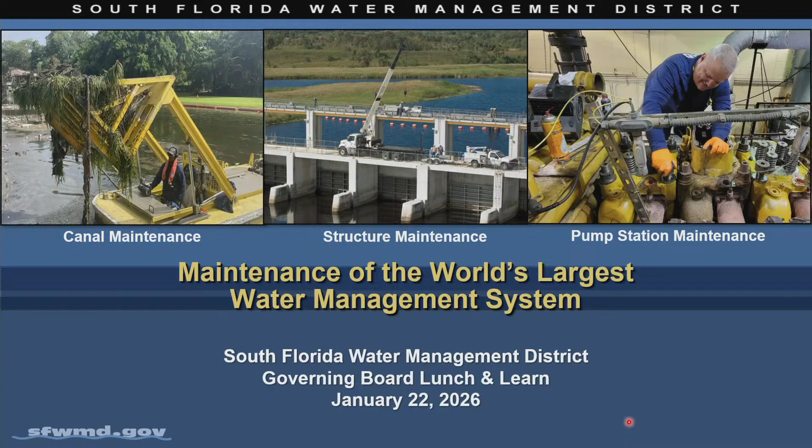Thank you, Mr. Chair. So we thought this would be a very good time frame to basically do an education of the board and the public on what it means and what it takes to maintain one of the world's largest water management systems. We just submitted last week our preliminary budget for next year. And whenever you look at the South Florida Water Management District budget, what you see is a major investment in maintenance and operations of our infrastructure. It is the lion's share of our budget, generally speaking. And so we wanted to do a lunch and learn to go through all the details and what it really means to maintain and operate our flood control system.

The rains we had with Hurricane Irma were the same that were deposited during the 40s hurricanes, and you did not have the widespread flooding that you did at that time. So it protects homes, businesses, households and communities, so it does a fantastic job. But as we have learned, it also has consequences. While it underpins the economy of the state, there's also economic impacts when it comes to dumping a lot of valuable freshwater resources into our estuaries and on top of the Everglades and Lake Okeechobee. So you end up with wildlife impacts, you end up with economic impacts.

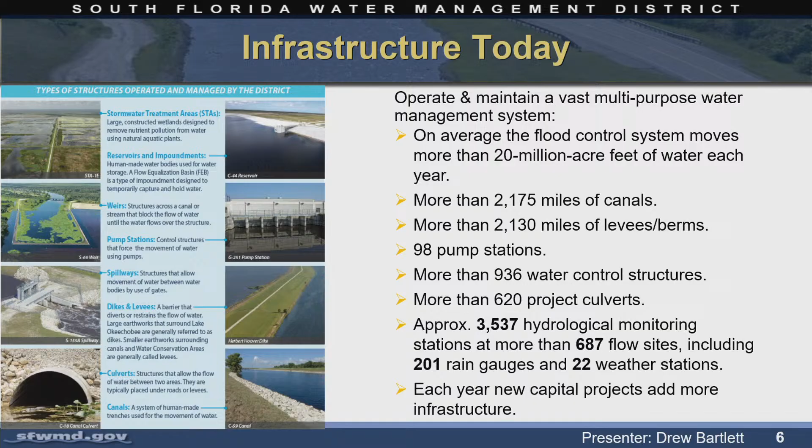And also, as we stand here today, we're adding new infrastructure year by year. Heck, next week we're going to cut the ribbon on even more infrastructure, right? And that's because of these unprecedented investments, right? We talked about the damage this system was doing to parts of our system and the economies of parts of our system. And that spawned the governor working with the legislature to really do some investments to retrofit this system.

And as of this week, we're up to 82 projects and milestones completed to basically replumb South Florida to use water better. And what that looks like is, in pre-2019, you had these harmful discharges. You remember the discharges in 2018 going west to the Caloosahatchee Estuary, taking toxic freshwater algae, then interacting with red tide and causing an economic calamity on the West Coast. The same thing happened on the East Coast in 2016, the lost summers.

And if you think about it, that's valuable fresh water. So you're dumping it out to sea, right? And the better thing to do with that is keep it in the system, protect the estuaries from those harmful discharges, and put it where it needs to be, which is what this past 7 years of investments has done. So you have better water going into Lake Okeechobee. You have reservoirs east and west of Lake Okeechobee trying to intercept those flows.

And the C-44 to the east side has been online for a couple of years. It is absolutely doing that. This past wet season, we didn't let any water out of the C-44 into the estuary. It all was put into the reservoir.

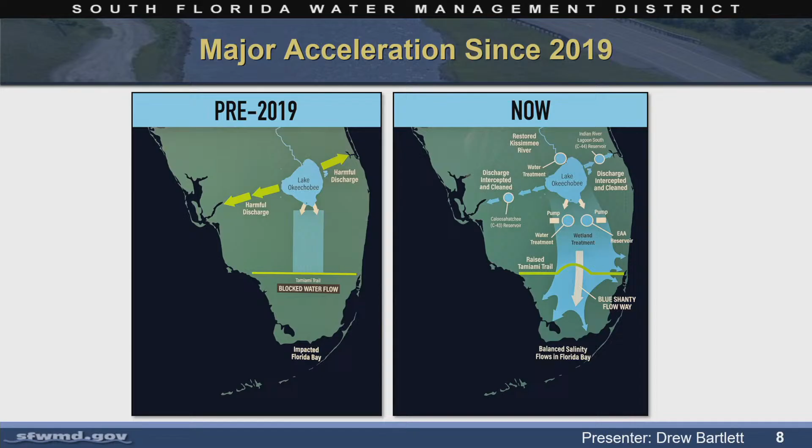And so retrofitting that whole flood control system means we're completing projects. And when we're completing projects, they're coming online and shifting to operations, right? And so we had the east and west reservoirs completed. And I've asked about the budget and the budgeting for those. For the east reservoir, it's $3 to $4 million a year. For the west reservoir, it's $4 to $5 million a year. So these are new projects coming online that we have to incorporate into our maintenance budget.

That's the same with all the STAs we've been building around the system. South of the lake, the Restoration Strategies put 60,000 acres of STAs online, and if you add up all the STAs around Lake Okeechobee, you're up to over 100,000 acres of stormwater treatment areas, all to be operated and maintained. The list goes on. I mentioned we had 82, and so the last ribbon cutting we had was for the completion of Biscayne Bay coastal wetlands. That's more pump stations, more structures to maintain.

So the amount of infrastructure we're maintaining is growing, and we are seeing the benefits. We will see the benefits for our economy. We'll see the benefits for our natural systems, and so it is absolutely worth it, but it has to be maintained. And so this is basically the size of maintenance that we do, right?

And Rich will go into more detail, but it's large pipes, it's large engines, it's massive gates. You're using machinery to do the maintenance. It is not your toolbox, right? This is big time maintenance that we have to do, and it's for the benefit of all the people. We have 9 million people in the South Florida Water Management District, 6 million along the East Coast, tons of people and businesses depending on this infrastructure, and so the maintenance becomes critically important.

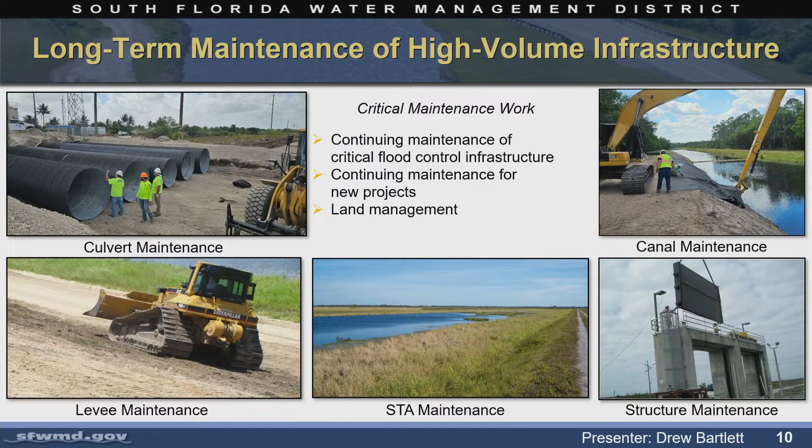You have to layer on top of maintenance basically that we have different conditions too. So Rich will get into the capital program a little bit, which talks about, hey, this structure needs to be rebuilt, but it also needs to be adapted for all these changed conditions.

The original flood control system was built to serve 2 million people, right? We've got 9 million now and growing. So it is something that has to not only be maintained, but it has to be adapted over time. And you really can't talk about the infrastructure maintenance without also talking about land management, because a lot of our infrastructure basically interacts with the land and it's there for the purpose of the land.

And so we will get into what it takes to maintain our 1,000,000 acres of land through fire, exotics control, all the different things we do to not only the hard infrastructure, but also the natural infrastructure that we have to maintain as well for the benefit of South Florida.

So while I'm talking about how it's a monumental effort that takes a lot of resources, I also have to point out that this district has also taken the initiative of making sure that we're lean when we're doing this. We're constantly innovating. We're constantly looking for ways to do more to be that impactful district to help South Florida, but not increase our taxes, right? To keep within our budgets.

And so over time, you've seen we've actually had a reduction in full-time employees. We've had a reduction in our operating budget while still accomplishing what we're accomplishing with permit reviews, all the new infrastructure we have coming online, land management, and it goes without saying that we're managing a lot more contractual dollars now than we were 10 years ago. And so we're doing more with less, but it's still a lot to do, right?

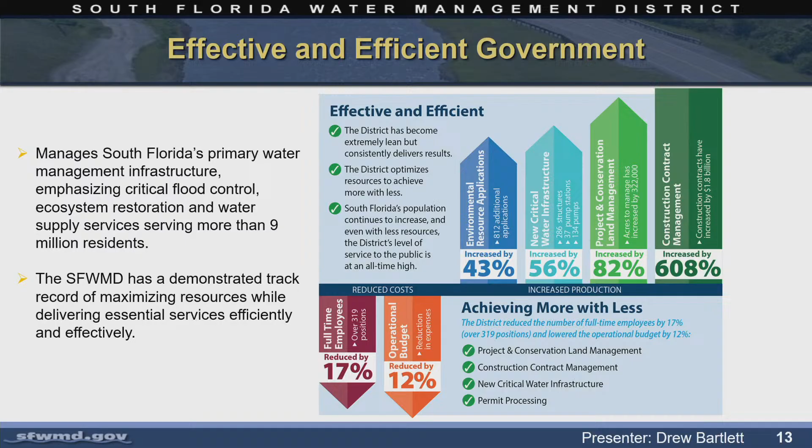So I'm going to turn it over to Rich so he can go into the details, and he's going to go into a lot of details, and that is on purpose, because to really get an understanding and a feel for what it takes to maintain this system, I think we have to dive into this and really understand what it takes. So with that, I'm going to turn it over to Rich Virgil to take you through the rest of the presentation.

Good afternoon. I'm Rich Virgil. I'm the Division Director for Field Operations. I can attest to the fact that the system has significantly grown in my 30-year tenure here at the Water Management District. I'm going to break the presentation down into multiple different facets, from the levees and berms to the canals to the structures, the pumping stations, communications, STAs, and reservoirs, and kind of give you a flavor for everything that we have to do to maintain this system.

I'm going to start with the fact that we have 8 field stations that manage all of this work, and they're located from St. Cloud to Homestead. Close to 300 staff manage all of the system for us. So I'm going to start with the levees here. The levees and berms, we've got 2,130 miles of levees and berms. They're very important to the system.

As you can see from this photo, this is a nice aerial shot from our S6 pump station, which is the inflow pump to STA2. At that corner, you can see the levees separating water conservation areas from each other. You can see a levee separating STA2 from the conservation areas. But levees also separate the water conservation areas from coastal communities in Palm Beach, Broward, and Dade. And levees also separate and segregate drainage basins within the EAA and other locations.

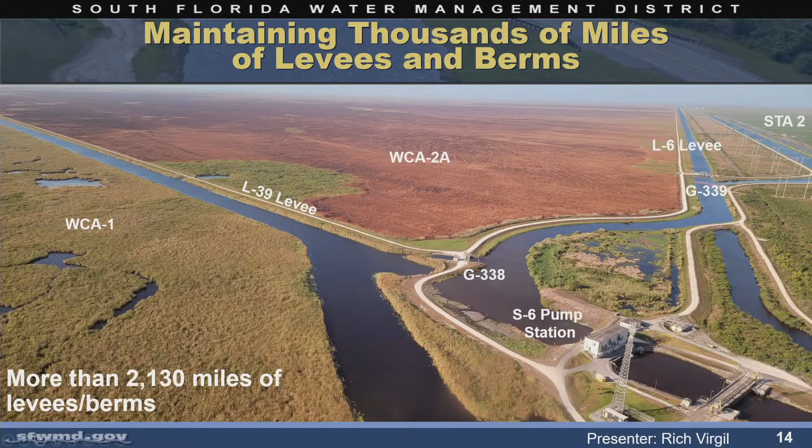So, what do we do to maintain our levees? Well, we want to prevent unwanted vegetation. And how do we do that? One of our big tools is mowing. And we mow in order to prevent woody vegetation from growing on the levees. Root systems can cause seepage. Root systems can cause unstable conditions within a levee. Uprooted trees and vegetation can cause erosion problems. And trees can even fall into canals.

So we do 4 mowing cycles per year. There are 2 types of mowing that we do: flat mowing and slope mowing. Flat mowing is open right-of-way mowing. Slope mowing is on side slopes that are greater than 2 to 1 in slope. Costs vary significantly based on location. In more urbanized conditions in the south, where contractors have to mobilize and demobilize and open gates and cross roads and bridges to complete their work, the cost is higher.

When you get into the Okeechobee area or the St. Cloud area where you have miles of open levee and canal, the cost is a lot less because they can get a lot more done in a day.

There's also an increased cost for slope mowing. Slope mowing can range from $180 to $280 per acre. It's again influenced by the urbanization effect, but it's more costly than flat mowing because you have to have specialized equipment to complete that, such as the photo here where district staff is using the articulated arm boom mower to mow the side slope.

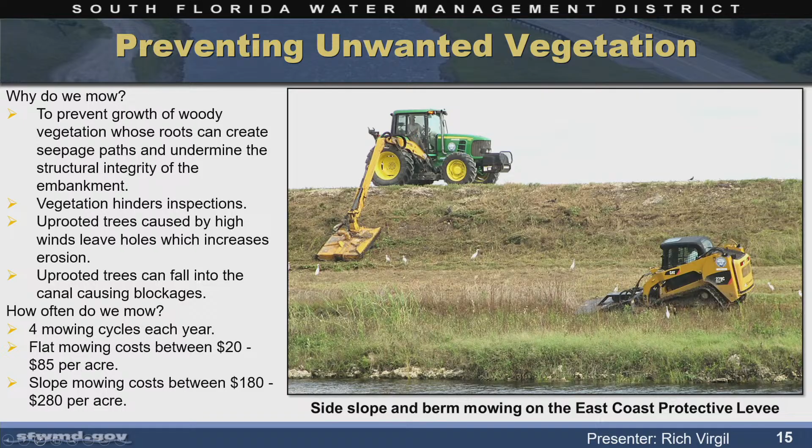In saying that we contract out mowing, we also do mowing in-house as the Fort Lauderdale team takes care of the East Coast Protective Levee throughout Broward and Miami-Dade counties.

We also maintain the levees through grading to prevent erosion. One of our main goals is to prevent the degradation of the crown elevation of the levee. So you want to do grading and control the water as it flows over from rain events so that it doesn't cause erosion to the levee.

We also have to maintain all of our roads. A lot of access is done from our levee roads and canal roads to get to all of our facilities for operation and maintenance as well as emergency response.

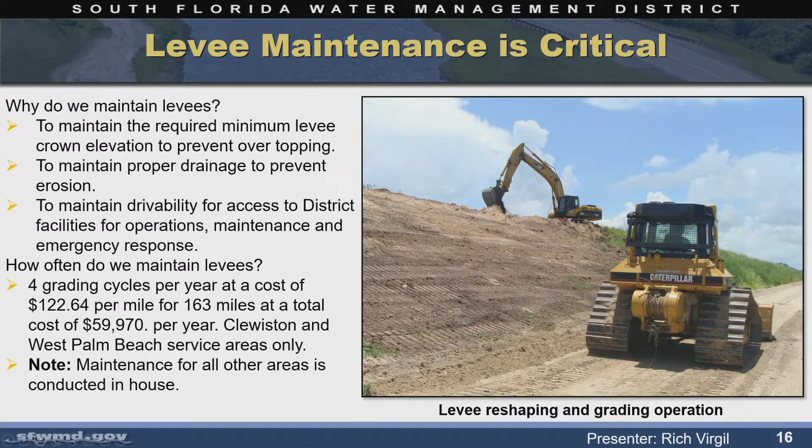Again, we do 4 grading cycles per year, and the contracts are isolated to just the West Palm and Clewiston areas because they have a lot more roads and levees to maintain because of all of the stormwater treatment areas in the area there. And then throughout the rest of the district, district staff maintain all the levees and roads. So you can see what we do to maintain that 2,100 miles of levees.

Now we're going to move into the canals. And again, we have almost 2,200 miles of canal. That's more than the distance of I-95 from Miami to the Canadian border. You can see our dredge here that works up in the Okeechobee area. I'll provide more information on that later in the presentation.

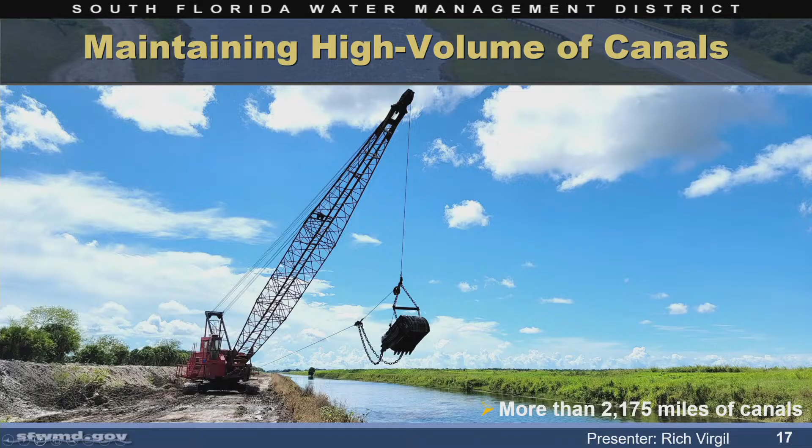So what do we need to do for our canals? Well, we need to keep debris and vegetation out of the canals to prevent flooding. Vegetation and debris can cause blockages at structures, which can increase flooding risk. We need to keep the vegetation out in order to keep conveyance moving in the canals and keep them free of issues. It also allows us to do our inspections and move around within the system.

And mechanically removing debris and vegetation from the canals keeps it from settling out to the bottom, which then can flush through the structure at a later time during high flow events.

So in Miami-Dade County, we do a lot of structure cleaning. We have a lot of debris in our canals because of the highly urbanized environment that these canals are in and serve. This is our poster child for canal cleaning at structures. The S27 is cleaned twice a week, as well as several other coastal structures in Miami-Dade.

Basically, keeping these clear keeps the structure open and the volumes flowing, but it also prevents all of this debris and vegetation from flowing downstream into Biscayne Bay, where it can have issues with water quality. It can even negatively influence marine life.

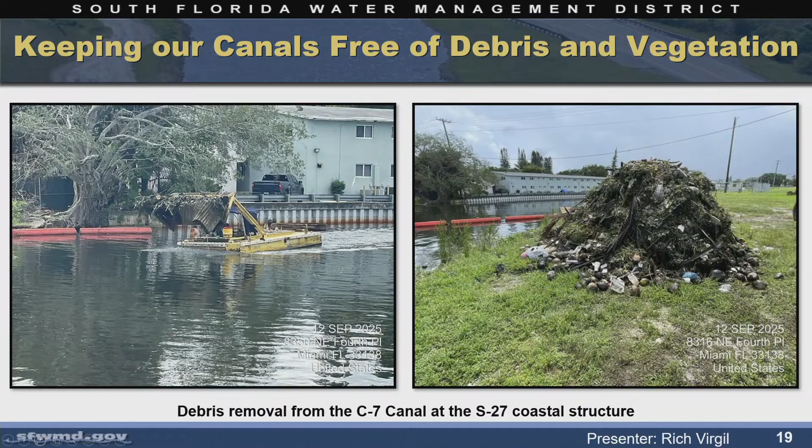So here's some canal vegetation work that we do in BCB on the Miller Canal, as well as the Miami-Dade Homestead canals. They're very shallow in nature, and those shallow canals during the summer months rapidly grow submerged aquatic vegetation, and you can get a condition in this before picture where the canal actually looks like it's topped out with vegetation. So we go in and mechanically remove this with boats and trash trucks so that we can open it up for flow like it is in the after picture on the right.

One of our other tools that we use is we work with our vegetation management section to work with contractors to remove vegetation and hazardous trees from the canal banks that can fall into the canal and cause issues with blockages. This is a picture right out here on the C51 canal where we've been working along the north edge of the canal to remove all the hazardous trees, the low hangers, the ones that overreach the canal.

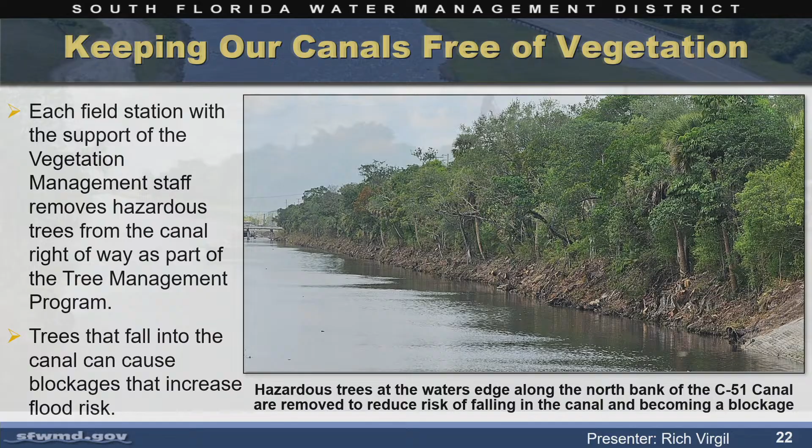The trees are then offloaded onto the bank, and then eventually they are placed into a chipping machine that shreds them up and chips them and then places them in the truck to be hauled off. So it's quite an operation, and this is just one of many locations throughout the district that we do this work each year.

Another tool is to use sterile carp. We introduce sterile carp to eat submerged aquatic vegetation from the canals. We stock the canals with these fish, not every year, but every other year or so. It's an effective way, a non-chemical way to control vegetation within the canals, to keep them all open and flowing.

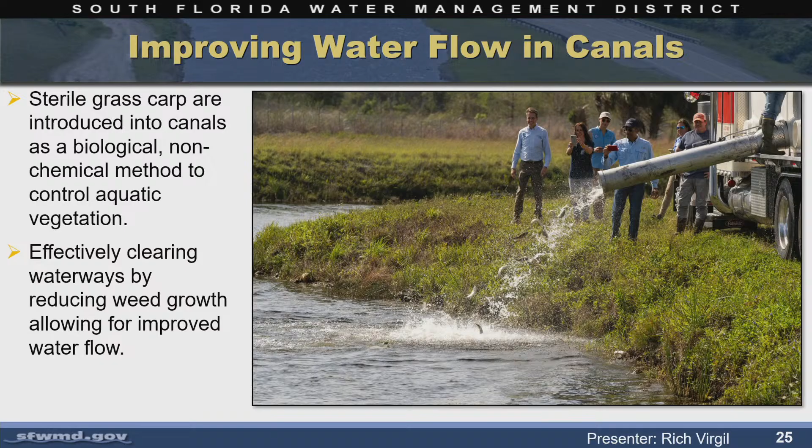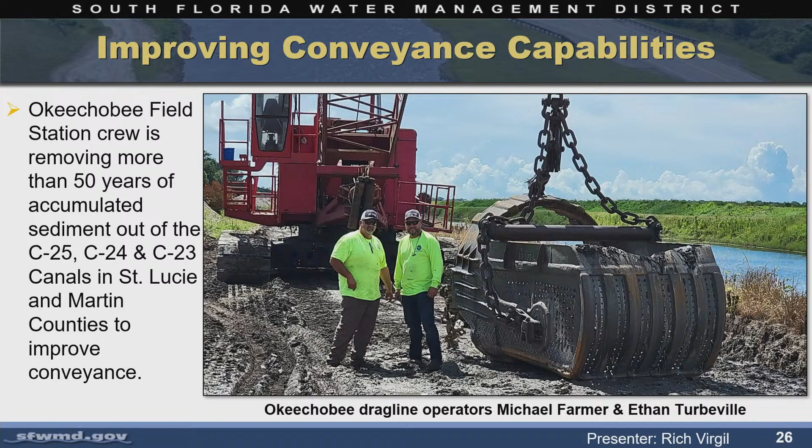I spoke earlier, we have our dredging program up in the Okeechobee area. So this is crews from the Okeechobee Field Station. They're removing about 50 years worth of accumulated sediments within the C25, 24, and 23 canals. This is going to be critical to get these canals open and ready for the CERP projects that are going to start up there in this area so they can work more efficiently.

So there's a whole process that goes into doing a dredge project. You don't just bring the dredge out and start digging. You have to be able to clear the existing spoil mound that was there when the canal was originally dug, clear all the vegetation. We open that up in order to get it ready to receive the dredge material.

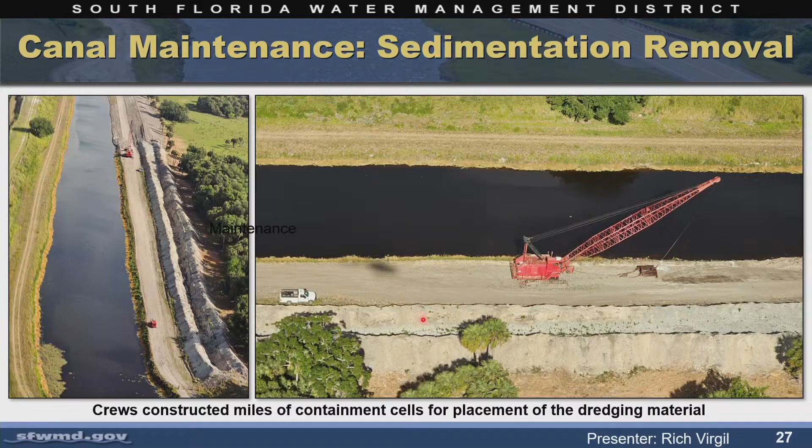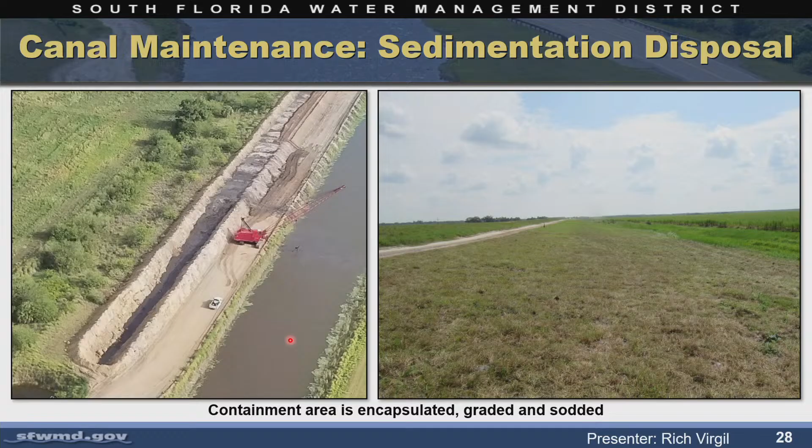Then the dredge comes in behind the prep work and starts dredging and actually fills the containment area with the spoil coming out of the canal. At the end, the containment is encapsulated, it's graded, and it's sodded to a finished product. And then hopefully we don't have to come back here for many years.

We also have a project culvert replacement program. So when these canals were originally dug by the Corps back in the 50s and 60s, project culverts were installed to drain floodwaters from the adjacent land into the canal. You don't want floodwaters from the adjacent property flowing over the canal banks, which would cause erosion. So you control the flow into the canal through a series of project culverts. There's over 620 project culverts within the system.

This is a large replacement that I'm showing you here that was done by the Okeechobee Field Station of a 50-year-old culvert on the C-41A canal. If you do not replace these periodically because they age out, they corrode, they rust, there's opportunity for them to collapse. That would damage the canal bank. It could damage a levee. So it's important that we have a program that addresses these culverts.

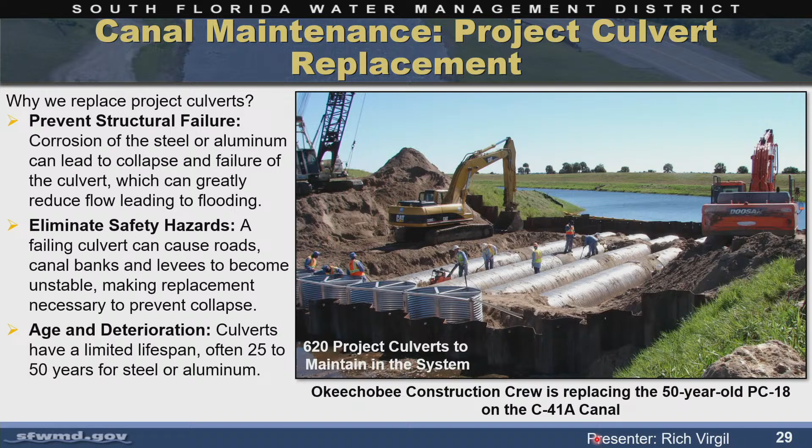So now you can see all the work that sort of goes into maintaining the canal system, right? We do vegetation management through mowing, and we do vegetation management through mechanical removal. We use carp. We do a lot of different ways to control and manage this almost 2,200 miles of canal.

Next are the structures. So we have 935 water control structures in the system. It's a massive system. This is one of our largest structures on the Kissimmee River. This is our S65E structure in conjunction with the S65EX1. Flood flow through this structure combination is 37,000 cubic feet per second.

So I'm going to get into some information on unique stuff and some different things that we do for structure maintenance. But keep in mind, structure maintenance is all about preventative maintenance. We do a preventative maintenance program on all of these structures. We have structure maintenance techs that do quarterly preventative maintenance.

We have electricians that go out to do quarterly maintenance to make sure all the power's working correctly, the gates are opening and closing, and the emergency generators on site can operate. That takes preventative maintenance, just like maintaining your car. There's also SCADA maintenance for the operations control side. We do a lot of maintenance on these structures, and we try to spend 80% of our effort in maintenance and only 20% in reactive emergency repairs and follow-up.

Here's a unique kind of maintenance above and beyond preventative maintenance. We have manatee protection systems on a lot of structures throughout the district. The manatee screens protect manatees from being harmed going through a gate, or prevent them from accessing sections of the water management system that are undesirable for them.

These screens, when the gates open, accumulate debris and vegetation, and they have to be cleaned so water can flow through the structure. This large one is cleaned at least twice a year, or as conditions warrant. It's a large mobilization and a lot of work to lift this gate out of the water. This is on a structure on the south side of Lake Okeechobee, where we shake it clean and place it back into service. We've also installed some permanent systems on some structures so we can be more reactive to the cleaning events and make it quicker and easier to do.

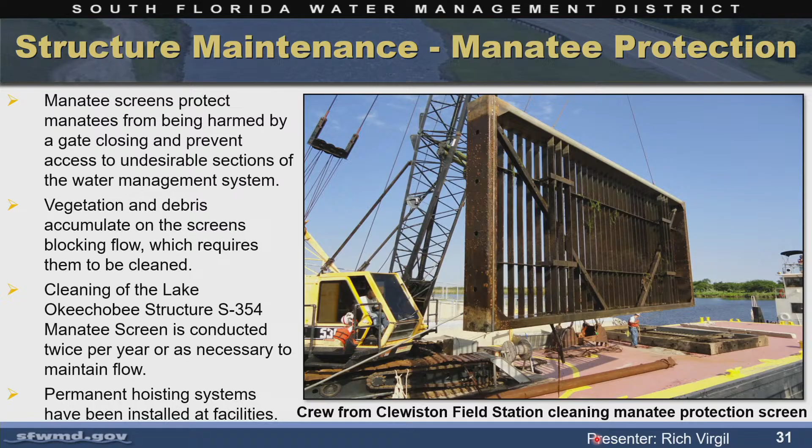We have manatee protection systems and electronic systems with bumpers on 36 gates and locks within the system. These bumpers have a life cycle of around 10 to 15 years, so they have to be changed out. Here's the field station working on this one. There's a bumper strip on each side of the gate. The cost per gate alone is in excess of about $125,000 just for the bumpers, not including the electronic side of the house, which also all has to be maintained.

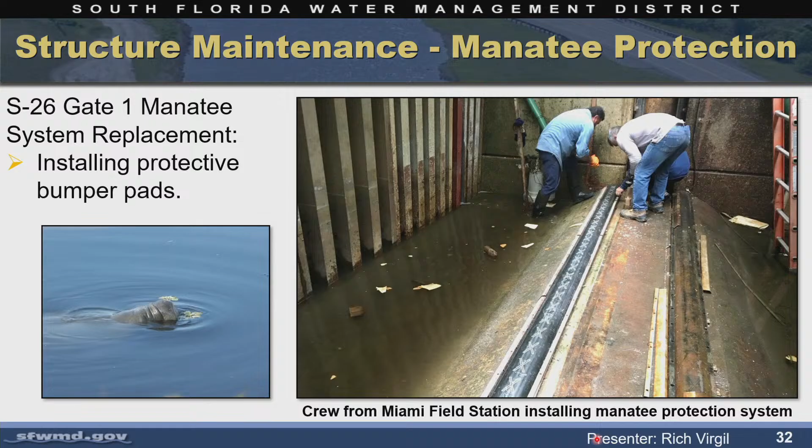Now I'm going to describe one of our big programs within the structure maintenance shop: our major gate overhaul program. We have a big facility in West Palm Beach where all the gates are sent for major overhauls. I'm going to step you through the process quickly.

Step one, we have to dry the structure in, meaning placing large panels into the structure. We have to have a diver in the water to guide the panels in and make sure the sill is cleared so you get a good seal. The panels prevent water from moving through the structure when the gate is removed.

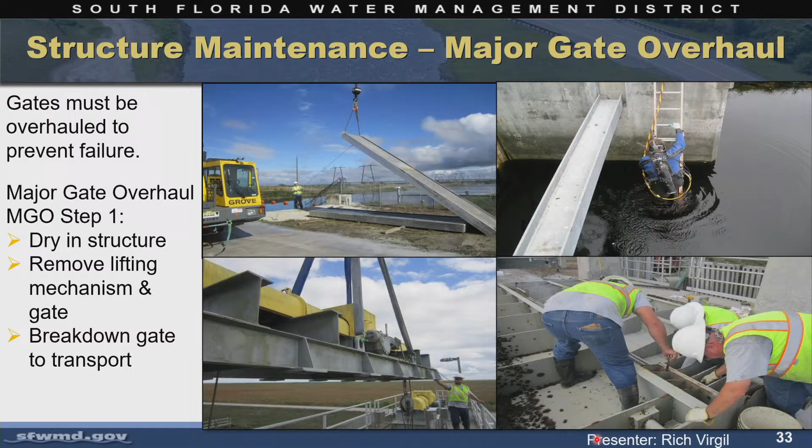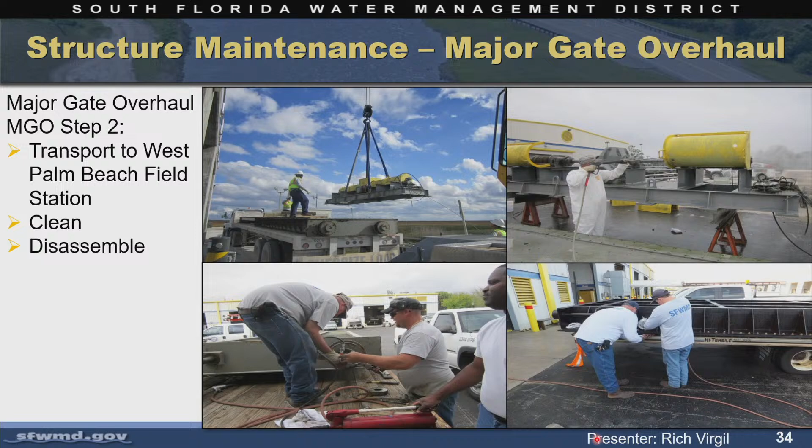Then everything has to be broken down and made ready for transport, and it's transported up to West Palm Beach. When it gets there, it's further broken down, disassembled, cleaned and prepped. We then get into making repairs to the gate, metal repairs, rust removal. The gate is completely sandblasted down, then recoated and painted in our facility in West Palm Beach.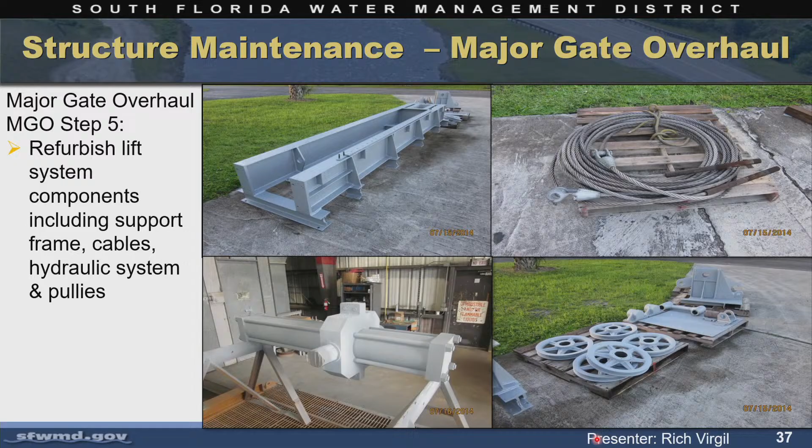Not all of them are cable driven — some are stem driven with electric motors, and those electric gearboxes and motors have to be disassembled, with seals and bearings replaced, recoated, metal work done on them, and put back together.

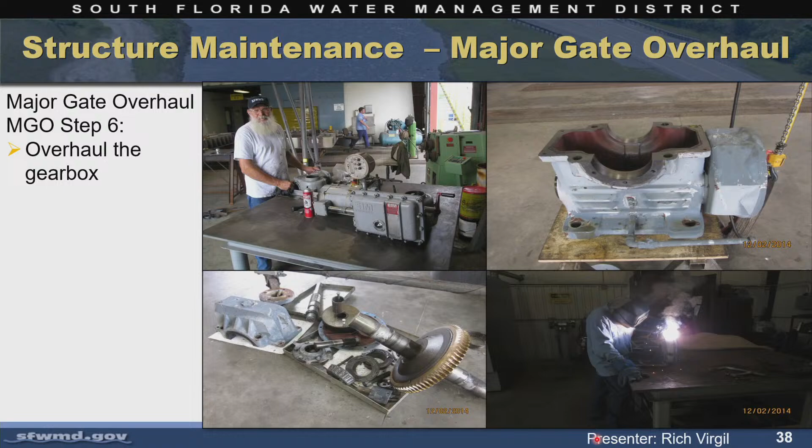Once everything's completed, it's shipped back to the site and reinstalled. The gates are overhauled on a frequency of about every 10 to 15 years. We do about 10 to 15 overhauls per year at a cost of around $46,000 per gate.

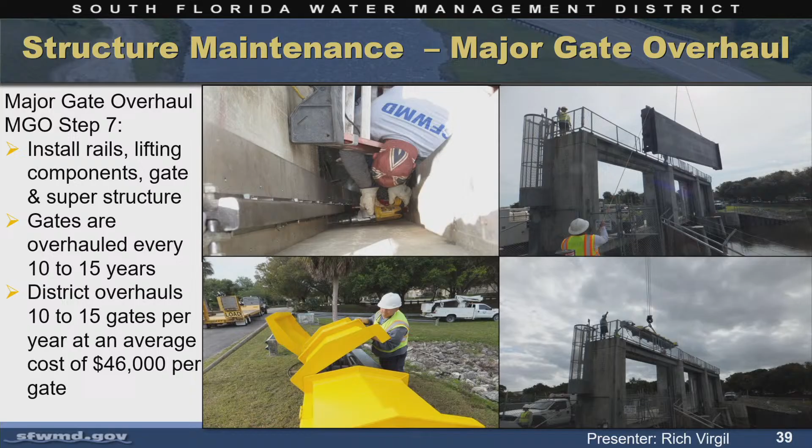So what we had to do is an in-field emergency gate overhaul. We pulled the gate all apart, took it out, and did a lot of work like I described in the previous slides, but did it in the field.

As you can see, we do a lot of different work for the 935 water control structures in the system, from our preventative maintenance to manatee activities to the major gate overhaul program and everything in between.

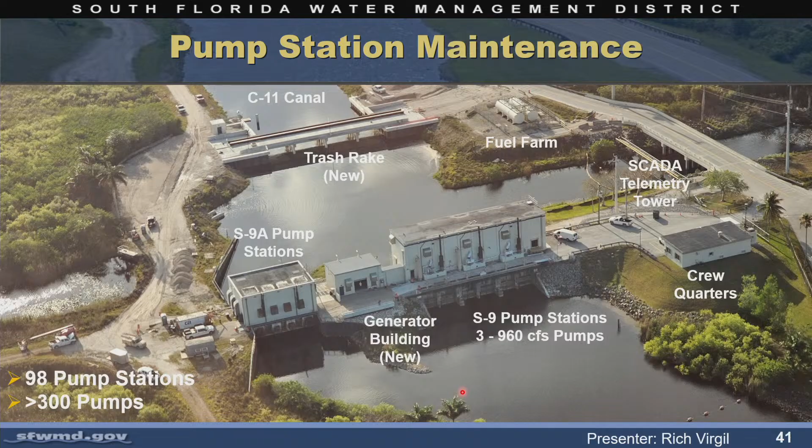So we're going to do a major refurbishment now on the S9 pump station. We had an inspection done that really drove the refurbishment in 2016.

It comes back and tells us, based on condition, that the pump itself is in bad shape and needs to be completely replaced, including the impeller, housing, shafting, everything.

There are also service bridge issues. So with further scoping, we're going to do a new service bridge, new trash rake system, new generators, and erosion control repairs that need to be done as well.

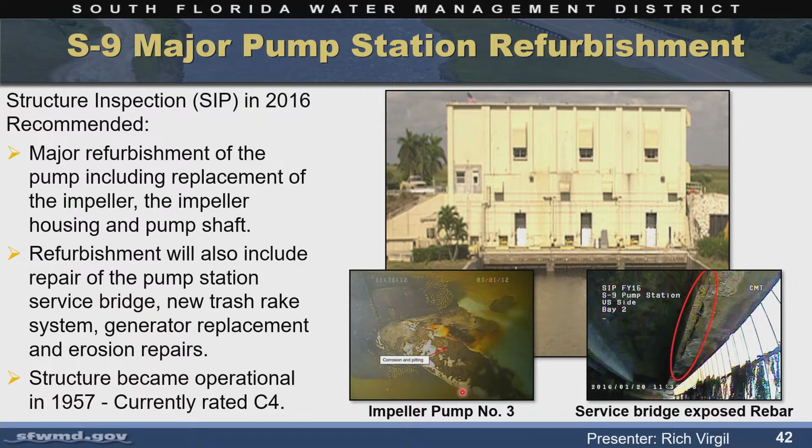The engineering and construction group puts together a great design package and bids it out. We end up contracting with Harry Pepper and Associates for the refurbishment of this pump station.

Like I said, it includes the bridge and the trash rake, new generator building, complete refurbishment of the 960 CFS pumps, retaining wall work, electrical panels, and other work at S9A that we did. Total contract value just over $41 million.

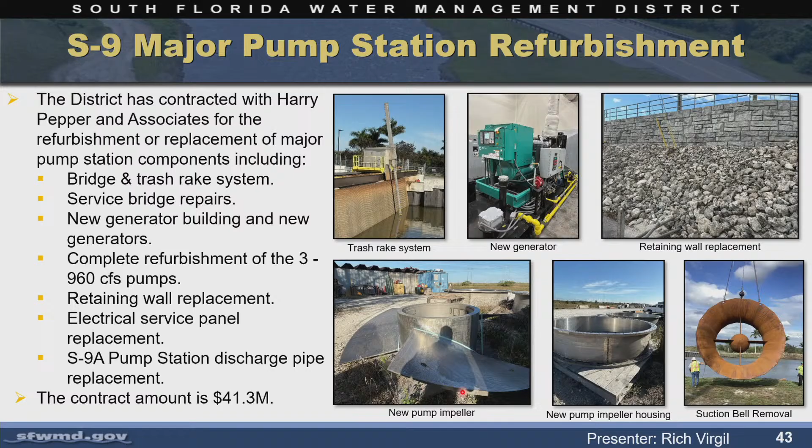Simultaneously with this, the district itself, separate from the Harry Pepper contract, contracted directly with the original equipment manufacturer, local Caterpillar dealer Pantropic, to overhaul and modernize the three main diesel engines in the station.

Part of the modernization included a new computerized control fuel injection system and a new engine control panel that now includes emergency shutdown systems, at a cost of about $2 million per engine.

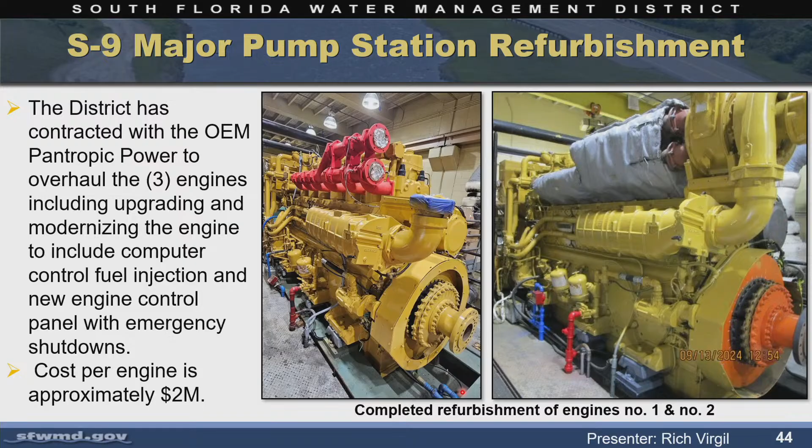We also simultaneously worked with the Philadelphia Gear Company to modernize and overhaul the three gearboxes in the station, including new bearings, gears, shafts, seals, painting, pumps—everything to make this like brand new again, at a cost of about $1 million per gearbox.

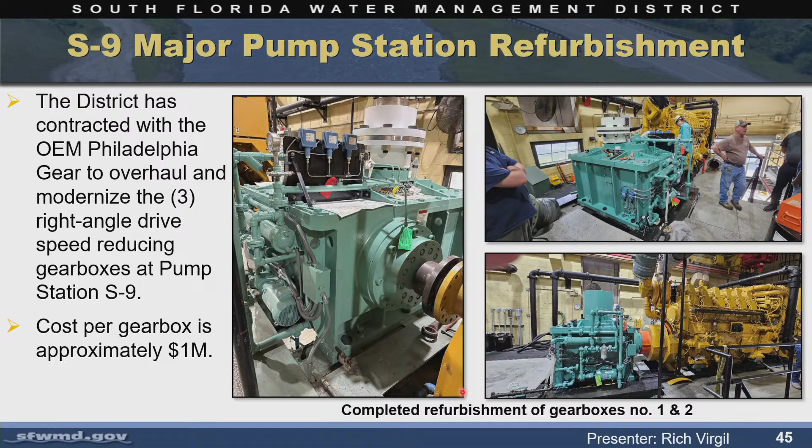So the $41 million with Harry Pepper plus the combined engine and gearbox work brings you up to about $50 million plus for the major refurbishment of this facility.

Now moving on to that minor mid-life refurbishment I was speaking of, that we do in-house with the use of contractors.

This is G370, the inflow pump station, one of the inflow pump stations for STA 34. It's a much more modern pump station than S9.

You can see the automated trash rake was already included in the original design. Again, the fuel farm, the telemetry tower, and the big main three exhaust silencers on the exterior of the building that support the engines.

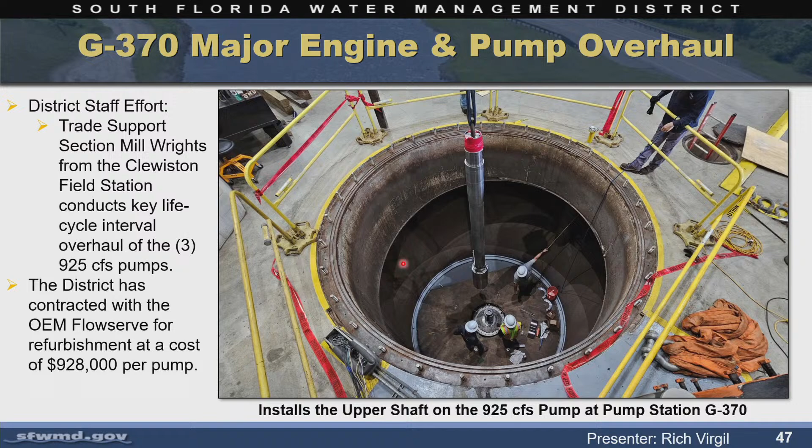So the district acted as the general contractor here to overhaul the 3 main pumps in the station. Our millwrights and trade support group handle the removal and install of the pump once it's completed. We contracted with the original equipment manufacturer, Flowserve, to do the actual refurbishment. This is reuse of all the parts, the shaft, the impeller housing, the casing. We just redo everything to make it fresh again for another 20 plus years of operation. It's not replacement like we did at S9. So we did a cost analysis of the savings from the district acting as general contractor. We did both 370 and 372, which is the other inflow pump for STA 34.

There's a total of 7 units. In our estimates of acting as general contractor for these 7 units, we saved approximately $4 million by doing this in-house, and now these units are ready for another 20 plus years of service.

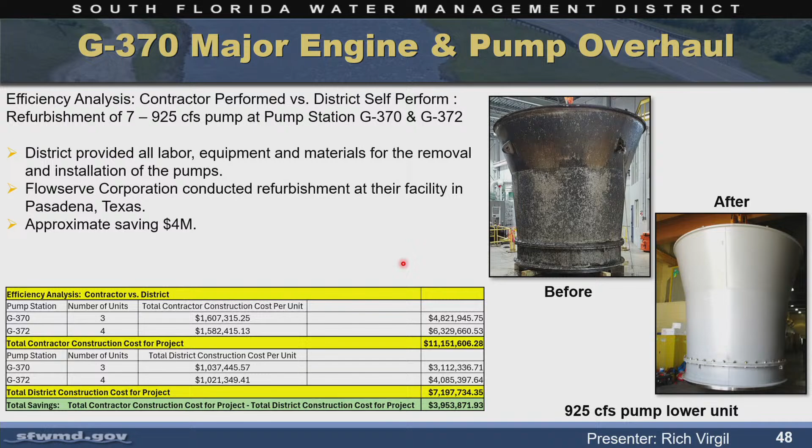We also overhauled the engines in-house ourselves. We have a whole fleet of Fairbanks Morse engines at 12 stations in the EAA, with factory trained technicians in-house who can overhaul these engines from top to bottom. We overhauled the 3 engines at G370 in-house for around $420,000 in materials. Had we taken the engine out of the station and had Fairbanks do it, or even brought their technicians in to overhaul the engine, it would have been well over $1 million per engine.

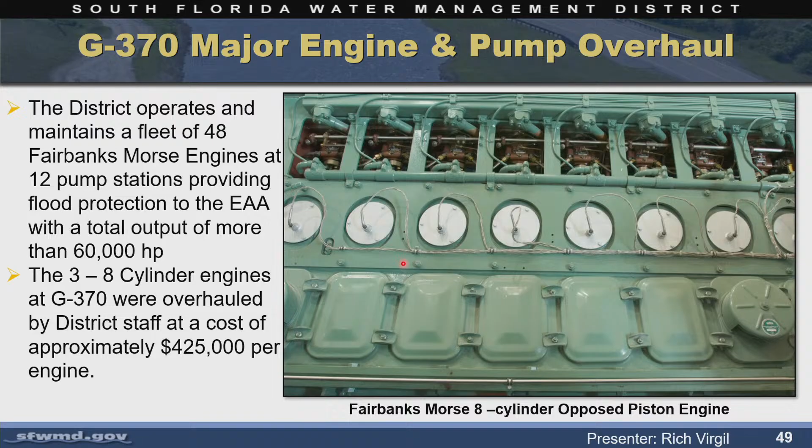Another part of the refurbishment is the engine control panels. The automation needs to be refreshed - it's electronics, a computer, just like your PC or your phone. We have to trade them in and upgrade them; if we don't, the factory no longer supports them. In this case, the district acts as the engineer of record for the project. We design and work with the original equipment manufacturer to refresh this. We do the design work, review the submittals, do the inspections, and manage the project.

The cost from Fairbanks was about $1 million. The cost to do the design and oversight of the project is probably about 30% of the contract cost, so we're saving a little over $300,000 for the project.

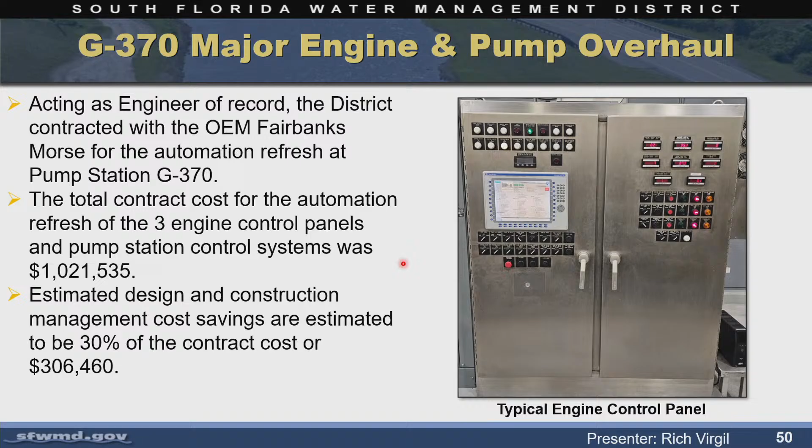Now we have some new features and new types of projects coming our way that historically we have not managed. So now we have reservoirs. Reservoirs still have pump stations, structures, embankments, and canals - they all have to be maintained as previously described. But now we have some new challenges and new things we have to do.

It can be monitored from West Palm. So like I said, we have our normal operation. I'm going to show you some new things that we have to do associated with reservoirs. We have to water now. We never had to water anything before. We let Mother Nature do all the watering previously.

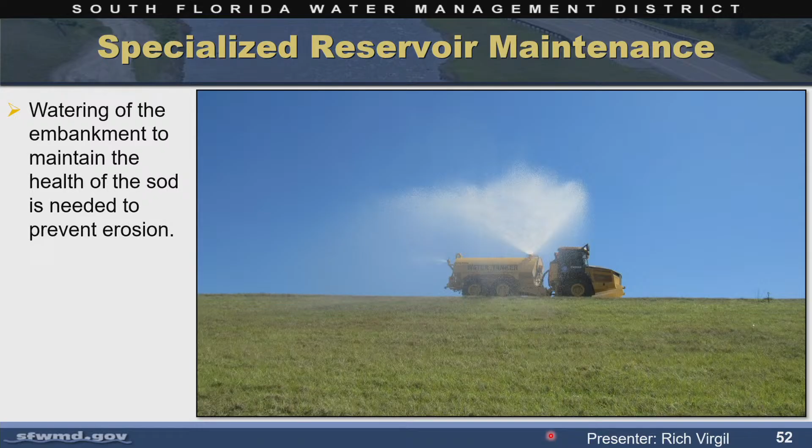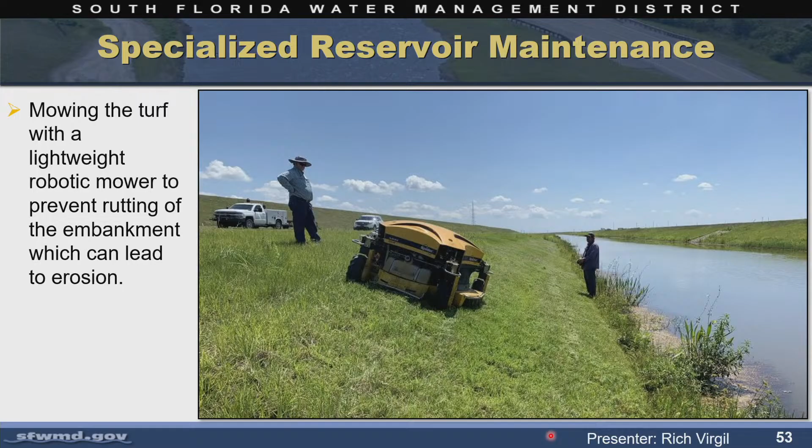We also have to protect these embankments more than we normally do from rutting and getting damaged. So we're even looking at some unique ways to do mowing, like robotic lightweight mowers that wouldn't damage the embankment. So now when we go out for mowing contracts, we also contract for the services of an agronomist who's going to do soil sampling for us. And we can do soil augmentations to keep the turf in really good shape, to prevent erosion.

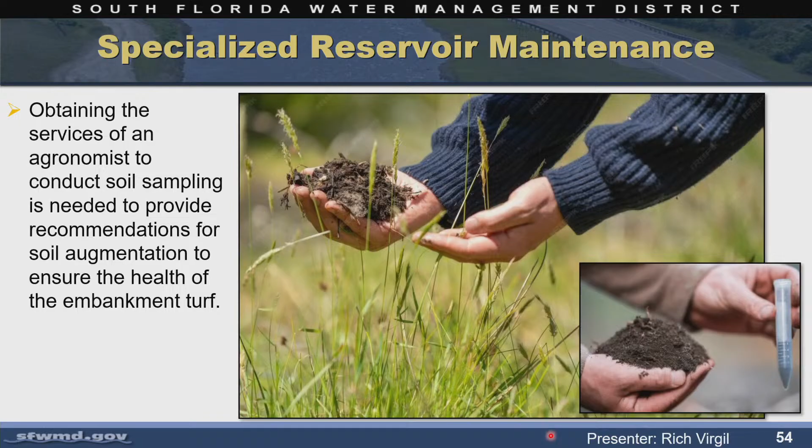We also have to protect gopher tortoises, and we have to protect the embankment from gopher tortoises. So if we find gopher tortoise burrows, they need to be relocated. We also have to manage wildlife like feral hog populations, because they can do a lot of damage to turf and the embankment. They root up the embankment and the grass in order to search for insects and grubs, and that's how they feed. A small grouping, 8, 10, 12 of them, can do an extensive amount of damage in no time. So we contract with trappers to remove feral hogs.

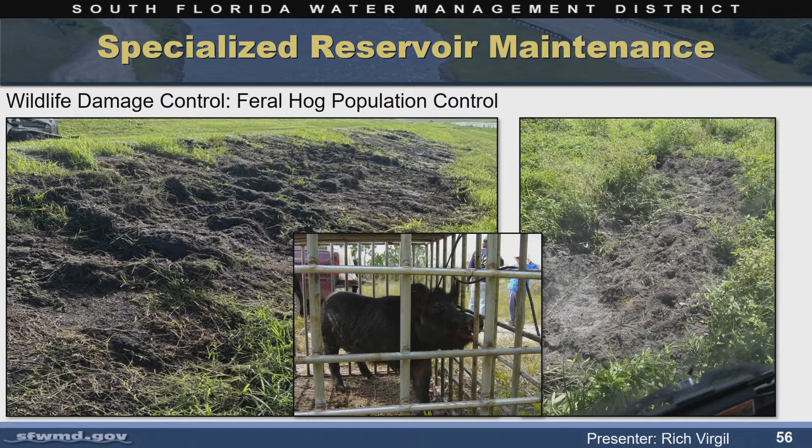And then we have our STAs. So again, the STA has all the components that the other pieces of the system have: the pump stations, the culverts, the canals, the berms, all have to be maintained as previously described. Now the district has over 100,000 acres of STA treatment cells to manage. I'm going to have LeRoy Rodgers, he's the section administrator for vegetation management. He's going to come up and provide you some details on specialized maintenance that we do for the treatment cells. Thanks.

Thank you, Rich, and good afternoon, everybody. Yes, as Rich said, LeRoy Rodgers, I'm the administrator for the vegetation management section, and as most of you are aware, one of the district's flagship restoration efforts is the stormwater treatment area program. This involves constructed wetlands that are designed to remove excess nutrients from our surface waters. And as Rich said, we're managing a lot of this. We have over 100,000 acres of STAs and flow equalization basins for this water quality improvement.

And vegetation is central to these systems and how they remove nutrients from our surface waters. A key concept here is that there are optimal plant communities that maximize STA performance, but plant communities aren't static. They're always in a state of flux. Disturbances such as storms and pest outbreaks, as well as natural succession, can all push these plant communities away from the optimal balance of emergent and submerged vegetation that these were designed to have. And when that happens, we start to see a decline in STA performance. So the vegetation management section that I lead, basically our mission is to keep these STAs in this sustained state of that optimal balance of vegetation, and it requires quite a bit of work.

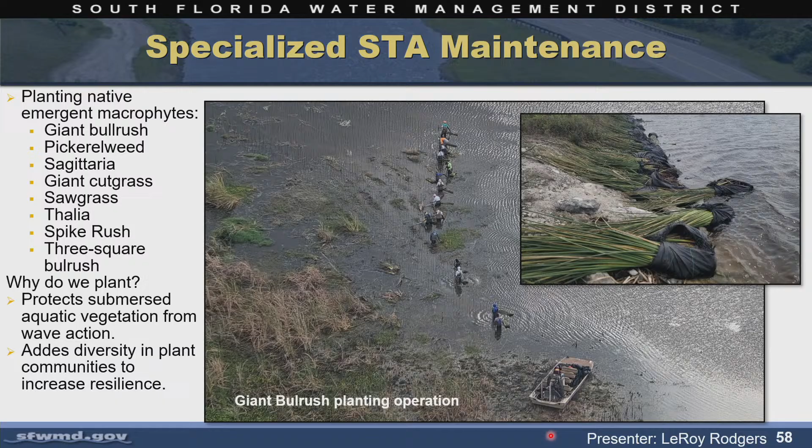In other cases, plant community succession may actually lead to too much of a good thing. Over time, emergent vegetation, especially cattail, can become too dense and crowd out desirable submerged aquatic plants in these mixed marsh areas. In those cases, we will selectively control the emergent vegetation with herbicides approved for aquatic use to restore that mixed marsh condition. In the photos here, you can see areas that were originally dominated by submerged aquatic vegetation. Eventually, they were transitioned to cattail, and now due to our management efforts are again supporting these healthy SAV beds.

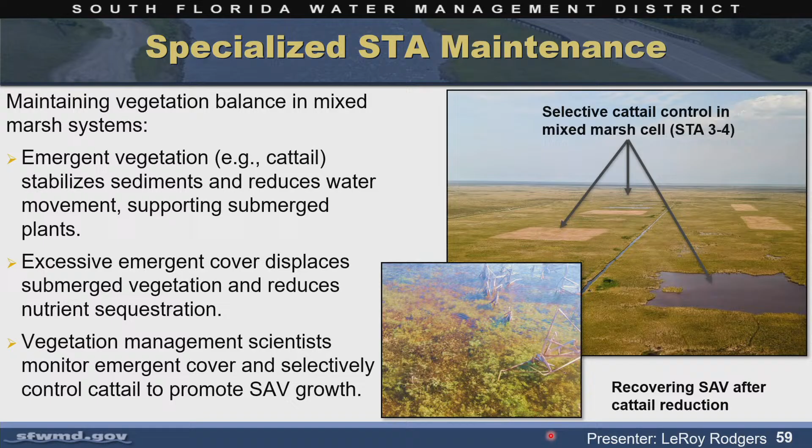At times, submerged vegetation may decline for other reasons. To address this, we will sometimes harvest SAV from healthy donor sites and redistribute it to areas where it's been lost. It's a pretty simple approach. We deposit this SAV biomass in the unvegetated area, and the plant fragments will spread around, root, and form new healthy SAV beds. And we found this to be a very cost-effective, low-risk intervention to maximize SAV cover in these STAs.

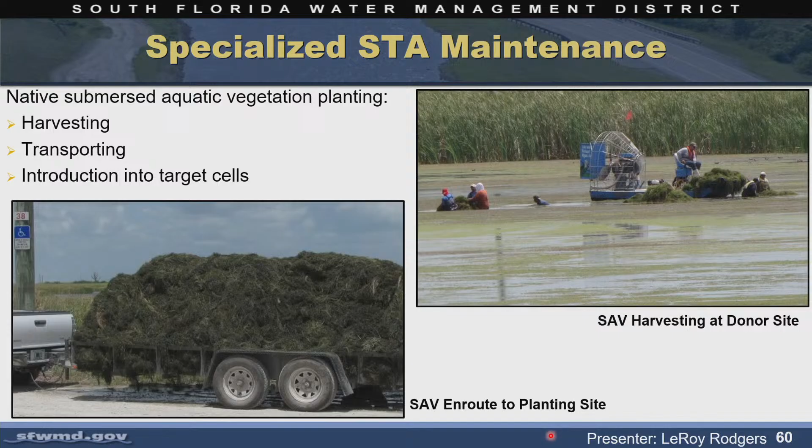So another persistent challenge we deal with in the STAs is invasive plant species. Floating plants like water hyacinth, water lettuce, and crested floating heart, shown here, can spread rapidly in Florida because they lack the natural controls that they co-evolved with. And so when they establish, they can quickly dominate the wetland and fundamentally change the ecology of an STA.

There are a number of reasons why invasive plants need to be controlled in STAs. First, they reduce plant diversity, and with lower diversity, we have a less resilient system to environmental stressors. We've seen cases where the sudden loss of a dominant invasive plant like hydrilla has left the cell unvegetated for long periods of time, sometimes up to a year. So we're really trying to have a diverse set of species that kind of hedge our bets to the various environmental stressors that the STAs receive.

Secondly, floating plants block sunlight, which shades out our desirable submerged vegetation and its associated periphyton. These plants also produce large amounts of fine organic litter known as flocculant, and when this builds up, it creates a very turbid environment, which again makes it very difficult for us to cultivate submerged aquatic vegetation.

And finally, these effects can, in extreme cases, lead to lower dissolved oxygen, which can then lead to phosphorus release from the sediment back into the water column, which is exactly the opposite of what we're trying to do in the STAs.

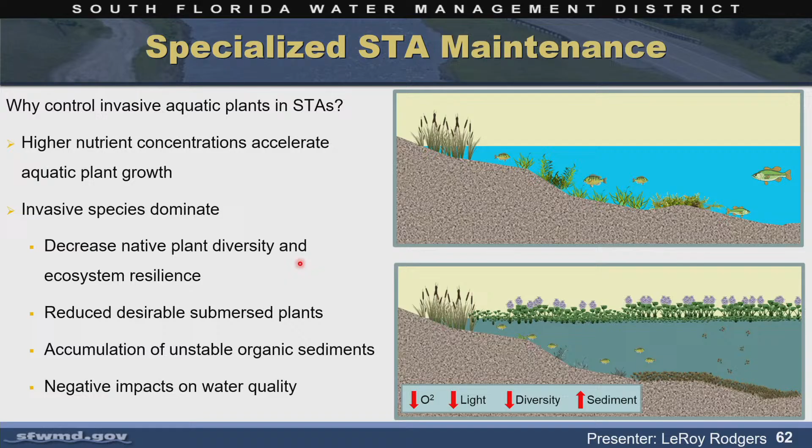Another persistent management challenge is the formation of preferential flow paths, or short circuits as we call them, which decrease the residence time of water flowing through the marsh. We want to maximize how long that water is in the marsh to get optimal uptake of nutrients. And when we do get these preferential flow paths, we will try to address those. Right now we're using semi-permeable marsh fencing to reduce the flow velocities in these short circuits and promote more even flow. We also use these in conjunction with our emergent planting to help protect those sensitive plants while they reestablish.

And we're now taking a closer look at prescribed fire as a tool to maintain desired vegetation conditions in the STAs. As many know, fire can reduce excessive thatch or accumulation of biomass. It can reset succession and help maintain mixed marsh conditions. In other areas, fire may help regenerate declining emergent vegetation in, say, cattail marshes and slow the shift towards floating tussocks or woody species like Carolina willow.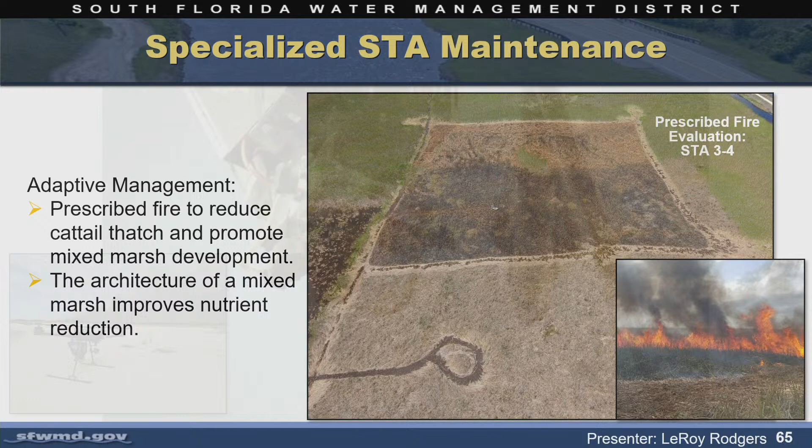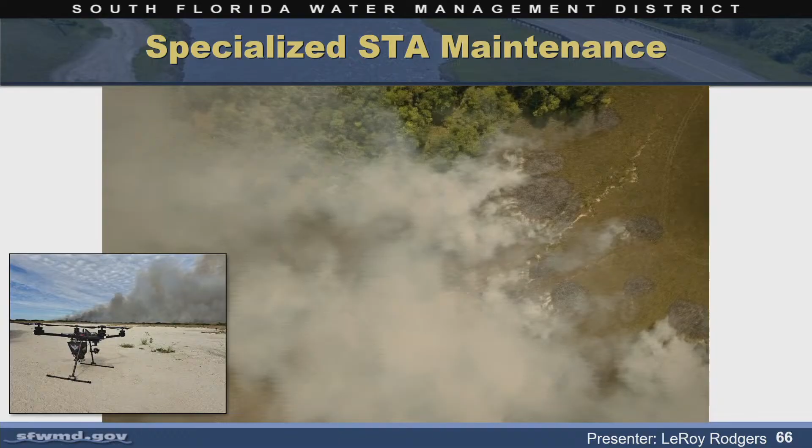And an emerging tool we're now evaluating is drone-based ignition for prescribed fire. Drones will allow us in the STAs to ignite burns while reducing the need for airboats and other heavy equipment that can harm the marsh. With this tool, the drones drop small ignition spheres that react chemically just before release, and they create a controlled ignition point in the marsh. We're really excited about this tool for using burns in the STAs.

And that's everything I have for the STAs, Rich. Thanks, Leroy.

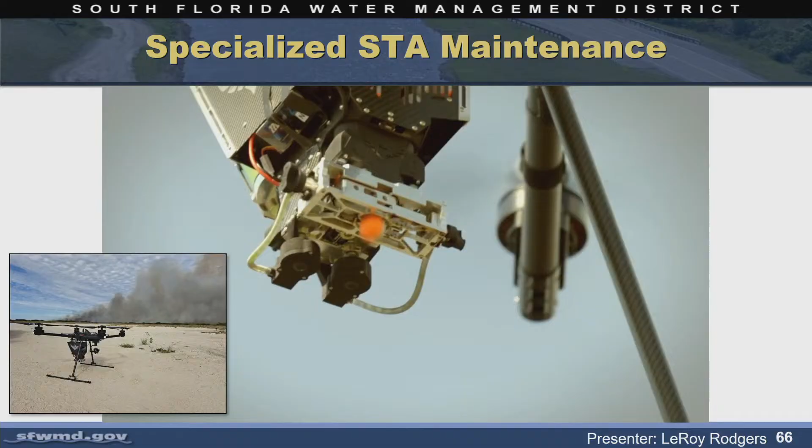These 65, like I said, allow the water managers here at the headquarters to monitor and operate and keep a lot of efficiency in the system. These are their eyes and ears on the water management system for the water managers.

These communication towers have a telemetry building at the base with all the electronics within that that operate that tower. They have preventative maintenance cycles that have to be conducted in order to keep that equipment in top shape. It also, like all electronics discussed before, goes through obsolescence and replacement cycles as well. And as the system grows, that becomes more of a challenge to keep up with.

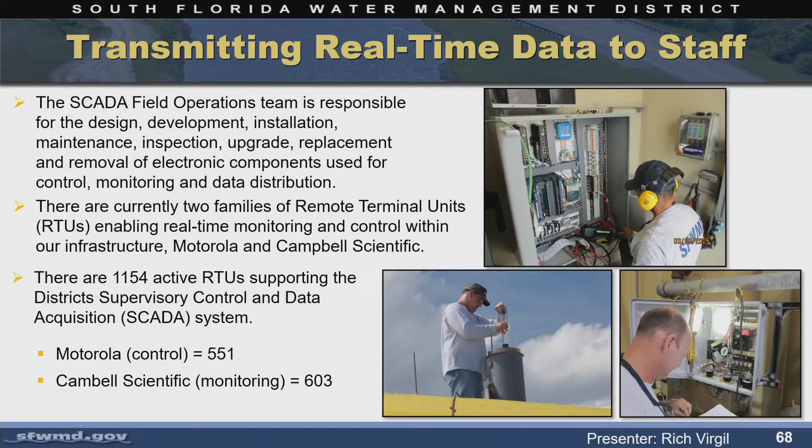All of these sites, almost 1,200 of them, have to go through preventative maintenance as well. The amount of preventative maintenance is done based on the site itself, agreements, mandates, the equipment itself, what it requires. There's a whole list of things here that get done every time they go out to check on the sites, from inspections and checking the batteries and the solar panels and calibrating sensors and such.

And then you can see from these photos, some of these sites are very isolated in remote areas. They take airboats to get to, regular boats to get to. Some even our float helicopter has to be used to access these sites. So there's a lot of work. All of this as well goes through obsolescence. This equipment, these sensors, the Motorolas themselves, the Campbell Scientifics, on a periodic basis, that all has to be upgraded and changed out as well.

So before I go a little bit further, I just wanted to briefly mention that the district has a huge fleet of equipment to do all of this work, right? We have over-the-road trucks, we have bulldozers, backhoes, we have cranes, we have watering trucks now, we have airboats. We have everything that we need to manage the system. It's over 1,000 pieces of either on-road or off-road equipment.

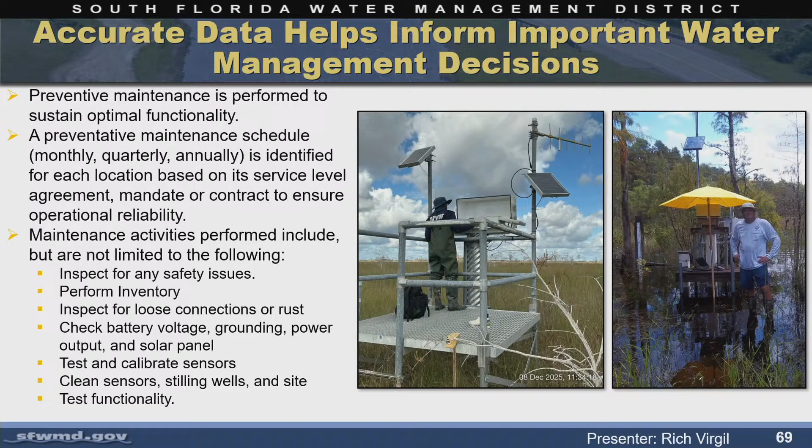All of the 8 field stations have fleet service equipment at each of the stations to maintain the equipment that's deployed and housed at their field station. It's a huge operation, and the guys are great at doing it. And we can turn vehicles around quickly and keep things mobilized. We can do repairs in the field when necessary, so things don't have to be brought back to the field station for repair. They're just really good at what they do.

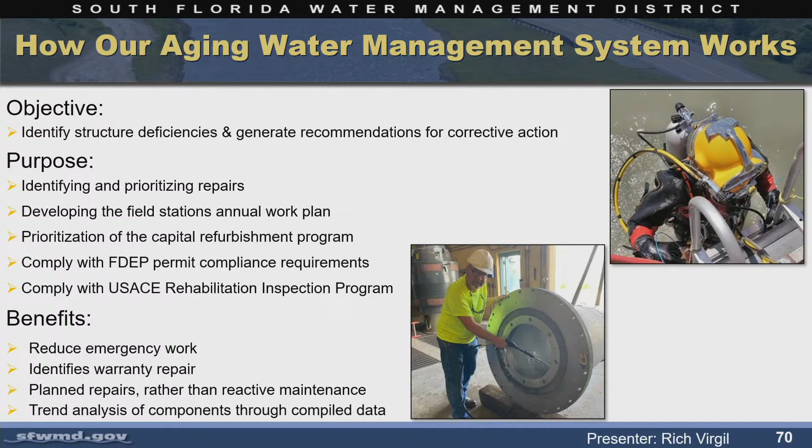So, all of this said, how do we manage, schedule, and prioritize all of this work that we do? So we have a structure inspection program where every 5 years, the water control structures and pump stations are inspected. We do a multi-engineering discipline inspection, including an underwater dive, to do this. And all of these inspections help the field station develop their annual plans and then prioritize the refurbishment of the system. And one of the biggest benefits of this inspection program is the reduction in emergency work.

So we do the inspection. Each structure is assigned a condition rating from 1 to 5, 1 being no action required, that's probably something brand new, and then 5 being something that needs to be worked on within the next year. The big takeaway from this slide, I think, is this is like a 15-year period. So back in the 2011-2012 cycle, we were at 464 inspections to stay on our 5-year cycle. Last year, we had to do 720 inspections to stay up with our 5-year cycle.

Our goal really through the inspection program and our maintenance is to not increase the C5s, the ones that require immediate attention, which we've done a pretty good job at being able to do. But we have seen an uptick in our C4s, right? Ones that need to be done within 18 months or so. Really, I think that's just a reflection on the age of the system. I mean, the original system is 50 to 75 years old at this point.

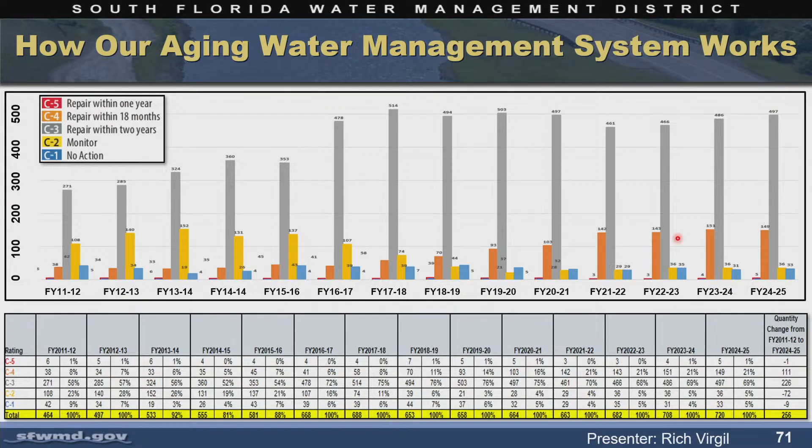So then we divvy up the work. Field stations take their things and work on it for the next year. And then the major stuff that has to go into capital gets forwarded to the engineering and construction group.

We further analyze the projects by doing a risk assessment for each project. We kind of follow an American Society of Civil Engineers guideline, but we have our own matrix that we use. But what it is, is the likelihood of failure times the consequence of failure, which gives you a risk score for that repair or capital project that helps us rank all of these capital program projects.

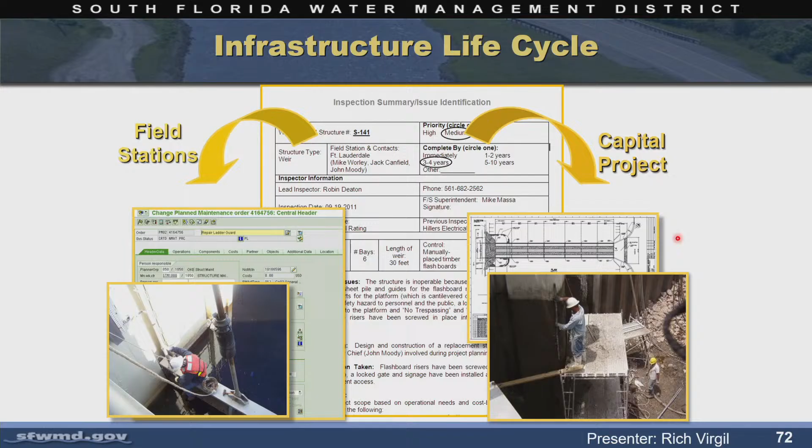So we know we have a lot of stuff in dire need of replacement. Some common and major issues that we see that push us towards these refurbishment cycles are like the acid attack of those structures in the northern section based on water quality. We have a lot of undermining of wing walls and foundations due to erosion problems and whatnot. Corrosion of metals and pitting due to our environment. A lot of coastal stuff with brackish water and things that require that type of upgrade.

Again, obsolescence is a huge piece because, you know, the factories and the components and different people do not support their older equipment, and you have to migrate towards newer equipment, especially in the electronic side of the house. And then, of course, issues associated with scouring due to high flow conditions and events and canal bank work that we have to do.

I'm just going to highlight a quick 4 projects within the system that have been queued up for refurbishment work, kind of north to south through the system. This is the S65 structure on the Kissimmee River. It's really been a structure that's been influenced by the acid attack and the degradation of the concrete, and it's accelerated this within the splash zone, or the area within the structure that repeatedly is wet and dry and wet and dry. You see an exacerbation or acceleration of the acid attack in those locations.

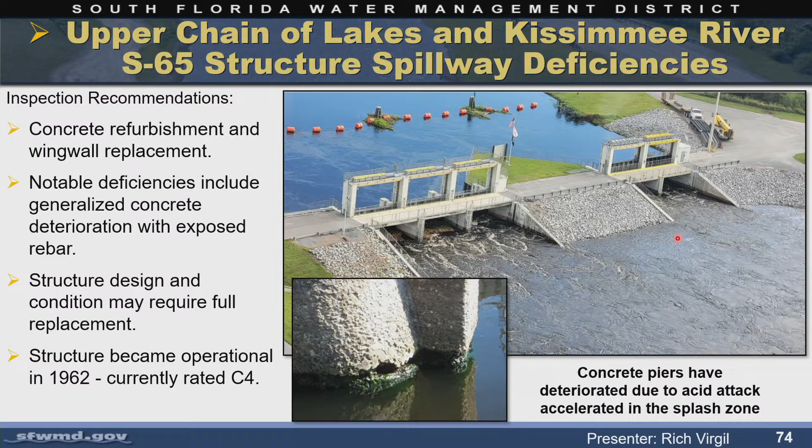This is our S6 pump station in the EAA. This is the inflow pump station to STA2. The inspection found the pump to be in really rough shape and in need of refurbishment. The refurbishment of this pump would be very similar to the S9 pump, where the entire inside or rotating assembly of the pump needs to be replaced. The shafting, the impeller housing, and so on.

When it's time to do the engines inside this pump station, they're the same as the S9 ones. They're going to have to go through that major refurbishment and upgrade for electronic fuel control. The gearboxes will have to be gone through, as well as auxiliary equipment that supports the main engines and gearboxes within the facility.

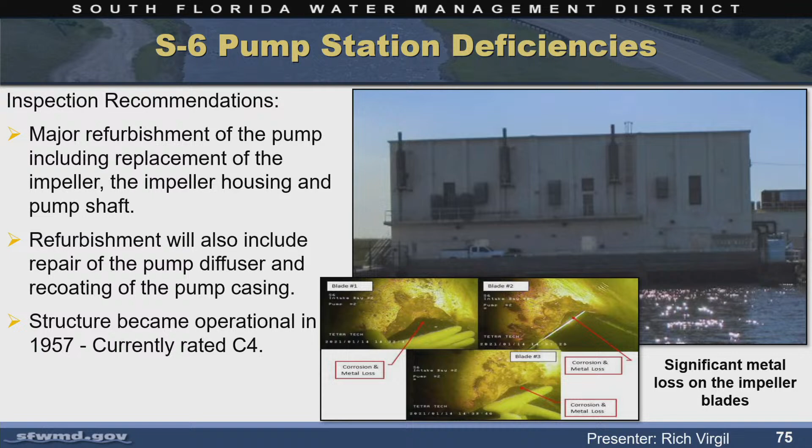This is our S29 structure down in Miami-Dade. This structure, through the inspection program, is being queued up for a refurbishment. You can see the service bridge with the exposed rebar, erosion issues, and degradation of the structure. But this is our poster child for resiliency, because this structure has been overtopped. The water has actually flowed backwards through the structure, over the structure during king tide events. So not only do we need to refurbish the structure, but we need to refurbish it for resiliency, right?

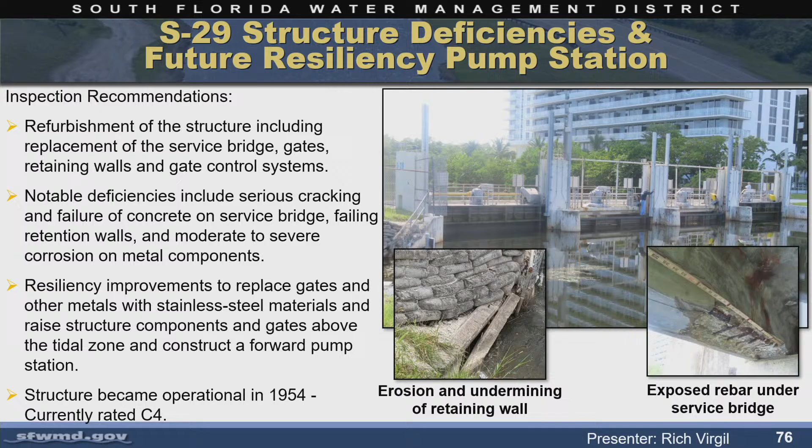So that means raising the service bridge, raising the gates, and doing a lot of stainless work and stuff to prevent further corrosion. And this station is also being queued up not only for that refurbishment, but a forward pumping station to supplement the capacity of the structure during high tide events and king tide events and whatnot. So placed into service 1954.

And my last example is the S332B and C pump stations. These were originally built as temporary pump stations to test out the idea of the modified water delivery program. They were successful. The district has kept these pump stations running since 2000, though they are temporary. This keeps our trade support group in the South very busy.

The 332s as well as S356. There is an engine, a pump, a gearbox out of these stations every single year for refurbishment. They run continuously through the summer months. We had a major shutdown of these two stations within the last 2 years. There's long, large discharge pipes out the back of these stations that pump over to a retention area about 2,500 feet away. The pipes became deteriorated. They had to be removed.

Okeechobee Field Station came in, did the pipe removal, basically built an above ground canal to channel the water from the pump station over to the retention area. So the replacement of this is going to bring this thing up to standard electrically, mechanically, and structurally, and save us a lot of time and effort and trade support each year too, because of just how maintenance intensive it is to keep these two stations, as well as the S356 station, in operation.

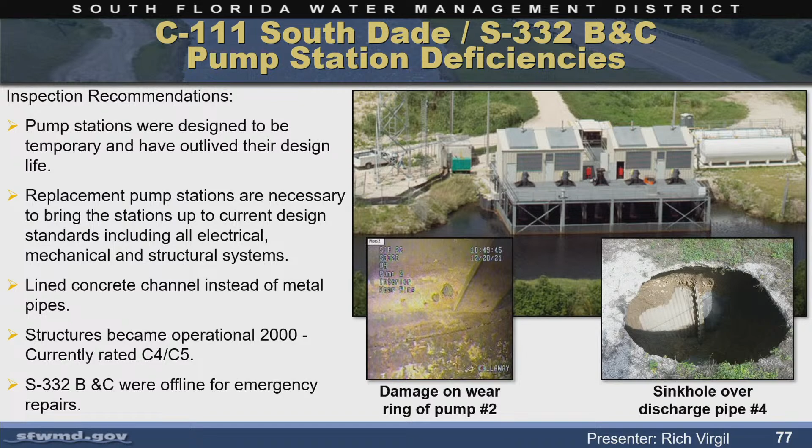So that kind of concludes my presentation on all the great work that the staff does. 2,100 miles of canal, 2,100 miles of levee, 98 pump stations, 930 plus water control structures. It's a massive system. It takes a large, massive effort to keep everything running, protect the citizens of South Florida, optimize all of the restoration program projects, and make it all happen. So with that, I take any questions.